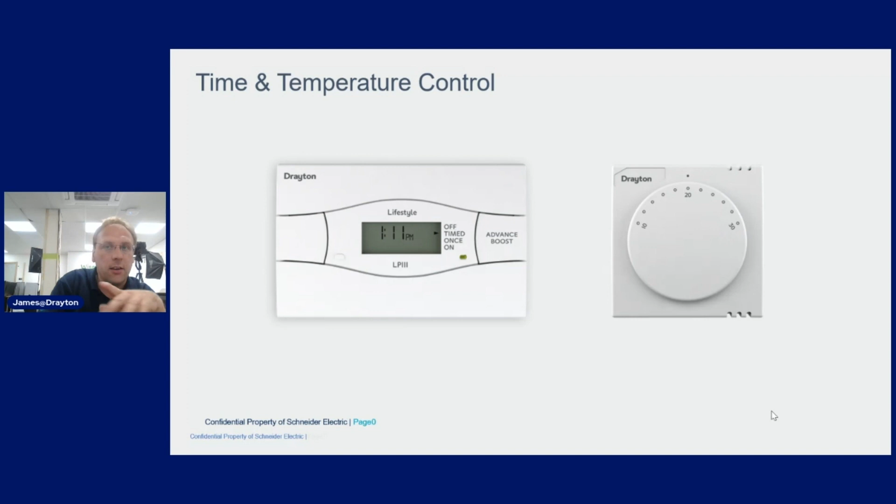So it's going to replace a time clock and a standard up and down non-programmable analog room stat. And it will also replace the Digistat Plus. So this is available as a Plus and a Plus RF. Still current at the moment, but you'll see as we get through that this new Digistat will take the place of all of that. The Digistat Plus is non-programmable, so you're obliged to have something on there doing your timings.

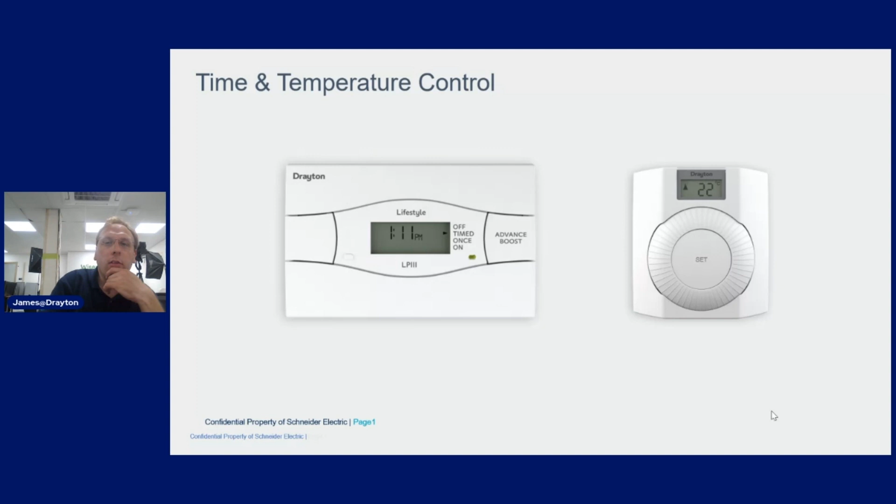Again, not terribly popular with combi boilers, but you do see a lot of these if you're doing, say, twin zone, which is your S plan, or biflow, your Y plans. A lot of people will have these as their air temperature sensing option. And this is what it's going to replace. So the familiar one with the wavy bottom.

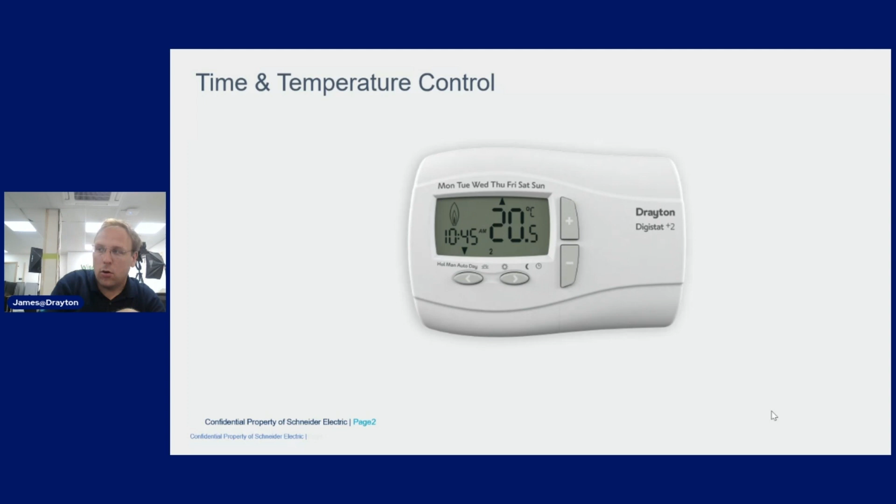Now you'll remember that there were loads of these, and you'll see on a slide that I show you in a minute, there were loads of different SKUs to this range, and one of the things we've tried to do with this new Digistat is simplify that range so that you're not having to hold massive amounts of van stock or getting really confused with part numbers depending on what model you want. So that's the sort of things that we're going to replace.

There are in fact two new RF options. There is a single channel which takes over from the RF 700, which is your Digistat Plus 2 RF, and the RF 701, the Digistat Plus 3 RF. But we now have a 2-channel version. So you've got the ability to easily upgrade your customer to an intelligent control just by swapping out the 2-channel programmer. When we look at the wiring in a minute, that will become clearer. So this is the sort of stuff that we're going to be replacing. This is what we're going to be replacing it with. So regardless of which version you have, they all look broadly like this.

And we've also now got an extra button. If you remember, if I pop back to that one, you've got your left and right hand arrow keys and your plus and minus. Now, anybody that's had to program one of these, particularly a plus 3 RF, and you want every day differently, you are hammering on that right-hand arrow key quite a lot.

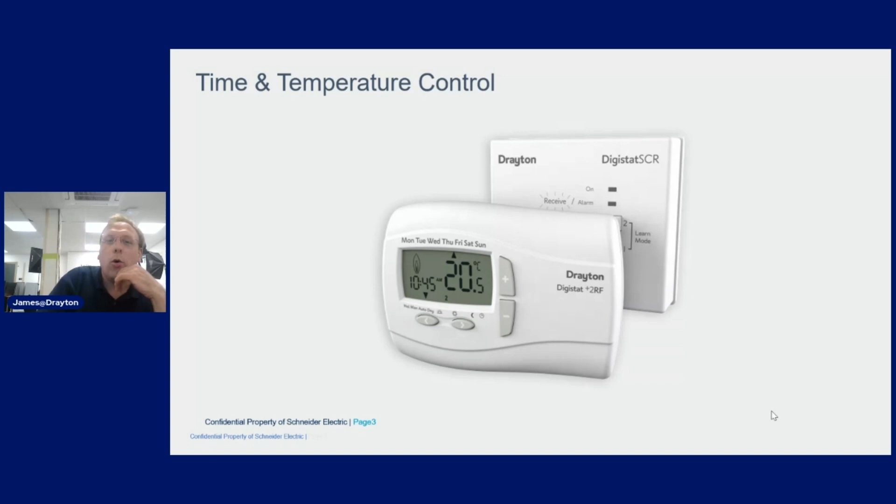So the idea is now you've got this confirm button, this extra circular button. You can view it as like a confirm button or an OK button, and that essentially allows you to take a lot of the button pressing out. You make a change, you confirm it. Much more logical and much more intuitive way of programming these.

So what's it all about and why have we done it? Well, the old one obviously has been around for quite a long time. I think it's sort of 19, 20 years that the wavy bottom version has been around, and it was time for a refresh, both in terms of features, but also in terms of the way it looks.

But one of the key features and one of the unique features to Drayton is the fact that we've got this Bluetooth app control. So this is by no means a connected product like Wiser. It's not something that you're going to connect to the internet, or use for remote control or linking to things like Alexa. This is purely local control over Bluetooth. But again, it's with this view that we want to give the customer the easiest way of controlling their device.

Now, depending on where the location of the Digistat is, it may be that it's not particularly accessible. So we've now given them access using the Wiser app. You download the Wiser Home app, the same app that you would use if you were installing Wiser, but the customer then connects via the Bluetooth journey. That means they've got control of their heating system using an app, but only whilst they're in the property. It doesn't require internet or a permanent connection to a third-party cloud service. You just connect your phone directly to it.

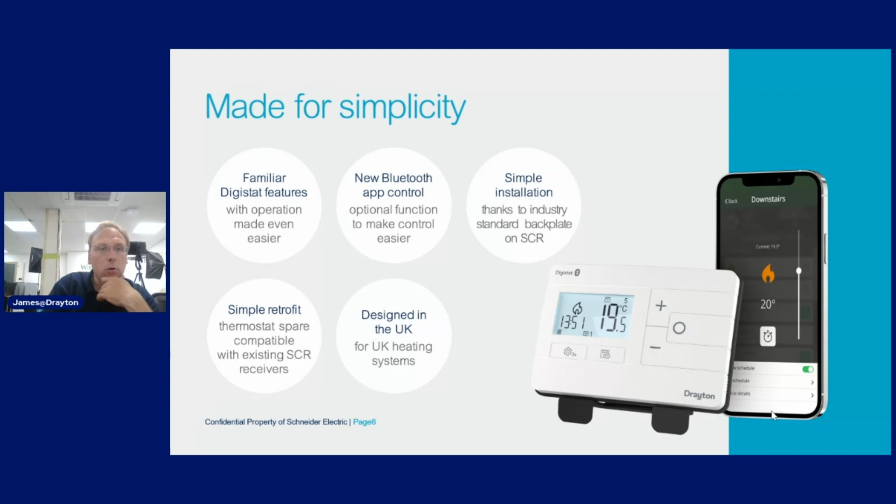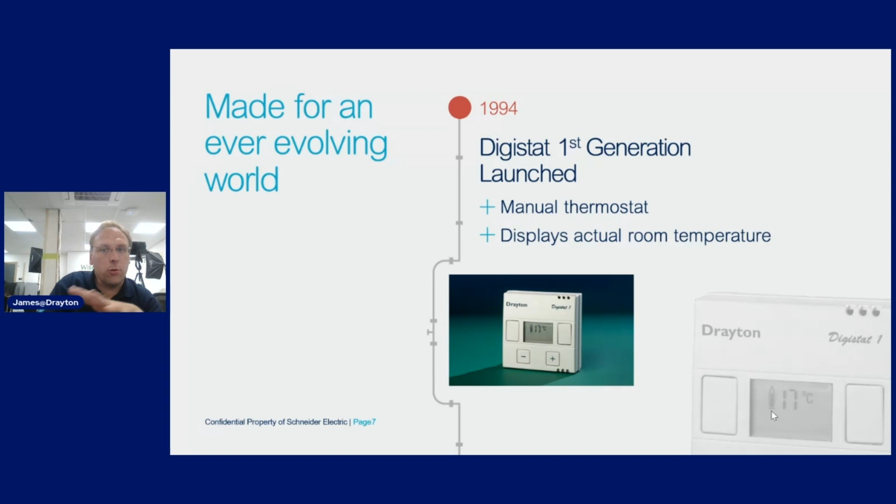And as always, with all our products, it's designed in the UK and designed for UK heating systems with UK installers in mind. So here's a little bit of a trek back in history. If you're old enough to remember the old square box Digistat, that launched in '94. I certainly wasn't doing this then. So first generation, and this was very much non-programmable. So the Digistat 1, and we also did an RF 1, which was the wireless version, just a standard up and down, plus or minus, very much like the Digistat Plus, which we've got now. But that's really where the whole Digistat journey started.

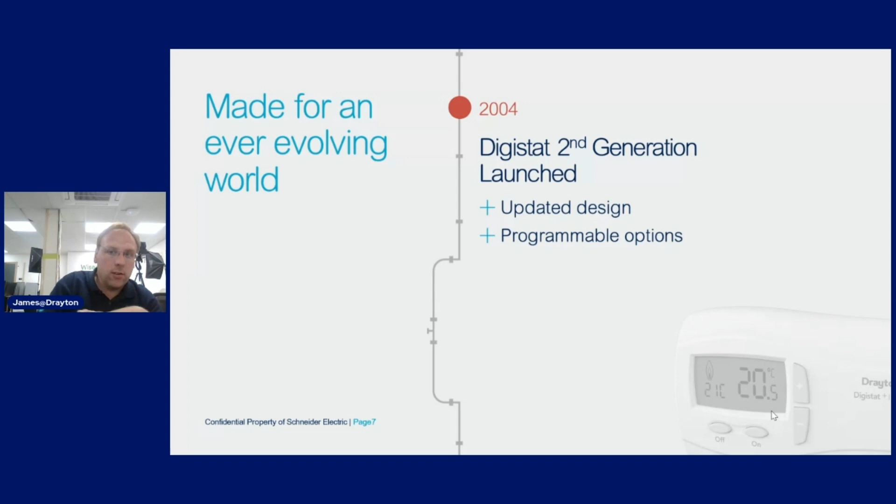And then moving on to 2004, so 10 years later is when the second gen, the one with the wavy bottom, came out. And we had then the programmable option. So this ability to be able to set different time and temperature events throughout the day, not having the need to have your time and temperature devices as separate devices, which you have to wire between. This is one wire, 5-core out of the boiler, say, into a backplate or into the actual control, and it does everything you need, both time and temperature.

Now, as it went along, we added some more options. So we quickly brought out the wireless versions. But as you see, by the end of 2004, we still had 16 variants, which, if you're trying to keep stock of this in the van, it's highly unlikely that you're going to keep one of every 16. And really, as we moved on, by 2016, we were starting to add SI versions. So you ended up with about 20 different SKUs in the range. So that's now stopped with the new Digistat, and the new Digistat renders down into 4 separate versions.

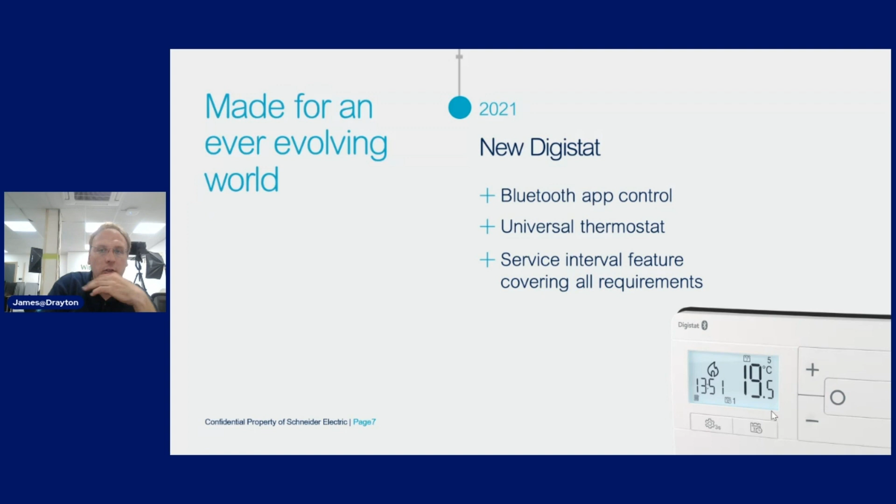So rather than purchasing the control based on programming, so if you wanted a 24-hour, you choose a +2, or a 7-day, you choose a +3, you now choose it based on the application. So what wiring is going to be there? 2-wire, 4-wire? Is it RF? Is it 2-channel? So you've now got 4 SKUs. Makes it much easier to keep enough kit on the van, so that you're not having to run to the merchants, and it just makes everything a lot simpler.

Now, this here is really talking about the whole backstory. So we know that having a smart, intelligent, programmable room stat is one of the biggest things that you can do to drive efficiency into your property, and particularly with Boiler Plus, most people are looking at controls to fulfill the requirements of Boiler Plus. So we know that the method of control is there for energy saving, but we've got this whole backstory, and this is the added value that you get, which is all of the manufacturing that's gone into it, where that's also made for net zero.

So things like no single-use plastics, making sure that any plastics we do use are recyclable, making sure nothing goes to landfill. And this is what sets us apart from the competition in a lot of cases, is that as well as producing a product which in itself can have a significantly positive effect on people's energy and climate change as a whole, we've also got this intense look at what's going on throughout the manufacturing process, and making sure that whilst we end up with a really good product at the end of it, it hasn't cost the earth to get there.

So really, that's another thing that, from the customer's point of view, it's a warm feeling to know that we have been looking after the planet and making sure we can do as much as we can through the manufacturing process, as well as the life cycle that then begins with the customer with the product.

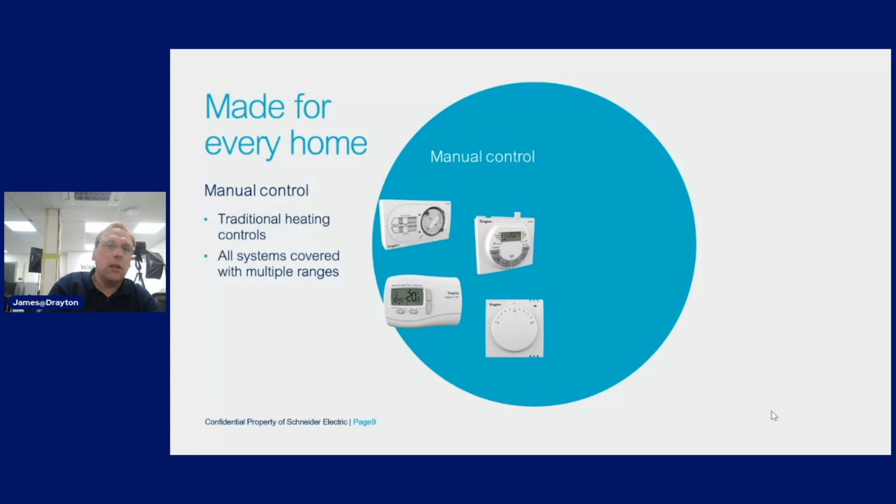So these manual controls, they tend to be our legacy products. They still do have a place in the market, but we're moving away from that in terms of the intelligent control. You've got the complete other end of the scale, which is Wiser, with the smart, that you've got individual room control, but the big thing with Wiser is the connectivity, all the cloud services, everything being collated and being able to see your energy usage.

It's certainly the way that we're moving, but it's not for everybody. If you haven't got an internet connection, or you're not interested, there's certainly generations of customers that I used to install for that you can't sell this to, because they just aren't interested, and it's not in their psyche to have a connected home, and it's causing more problems than it resolves. So certainly not for everybody, and that's really where the new Digistat sits.

It sits in the middle, and it's the bridge between the manual control, the familiar stuff that everybody's learnt to love over the period since it launched, and Wiser, which a lot of people aren't that comfortable with, having something that's constantly connected to the internet. So this is really where the new Digistat sits.

No Wi-Fi required. You do still get the app control, so you will use the Bluetooth link to the Digistat, but using the Wiser app. Now, obviously, you could say, well, to get the Wiser app, you need an internet connection, which is true. So at some point, you will need to go online and download the Wiser app. And similarly, if we need to do any firmware updates, we can do that via the cloud, bridging using your phone. So if your phone has an internet connection, when you go through and register, we can check to make improvements or feature additions that way.

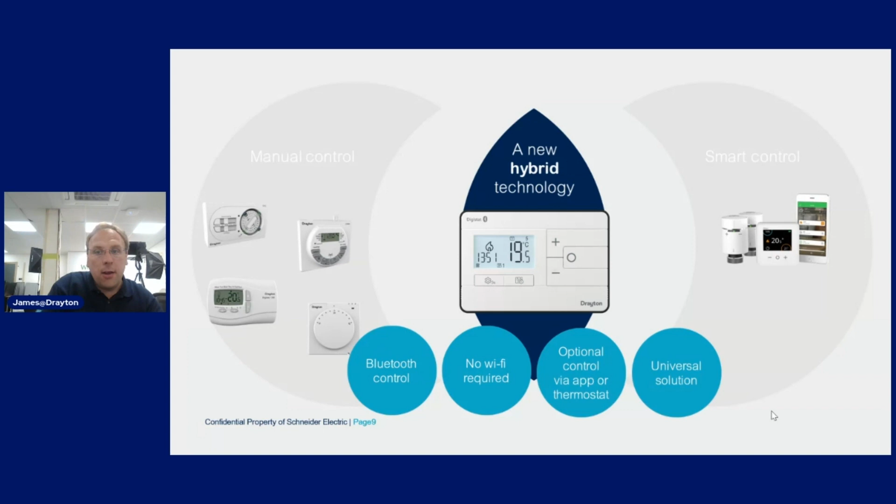So you don't need a permanent Wi-Fi connection. You might need something when you set up and first get going, but then, if you never want to connect it again, you don't have to, which is not how you would run Wiser. Wiser needs that connection, because there's so much data and so much cloud service going on. And I mentioned this universal solution. Well, that's what we're talking about, where we've now got these 4 SKUs.

So what's in it for you as the installer? Why would you be pushing this to your customer? Well, universal programming, that's the big one. So like I said, you're not buying a product for a particular way of timing it. Oh, it's +2, it's 24-hour, I needed a +3, back to the merchants. You're not doing that. It's user configurable.

So if you want every day the same, you can do that. If you want every day differently, you can do that. And if you want it on a 5-day, 2-day split, you can also do that just by changing the parameters in the back end. We have optimized it for all heat sources now. So we've always done oil, gas, and electric, but we've now got heat pumps in there.

So when you're setting the fuel type, what you're doing is setting the cycle rate. So gas, which is the default, 6 cycles per hour. So the boiler is likely to fire, assuming there's demand, once every 10 minutes, and the control will work out based on its thermal profile how long in each 10-minute block it needs to run in order to fulfill set point. Oil, 3 cycles per hour, once every 20 minutes. Electric is the fastest, 12 cycles per hour, so once every 5 minutes.

Now, for heat pump, we all know you don't want to be cycling a heat pump. So if you set it to heat pump, that takes away all the modulation. So essentially, if there's demand, the relay contact is made. As soon as you hit that demand, that's when the relay de-energizes. You're not cycling the heat pump. So we've optimized it for that.

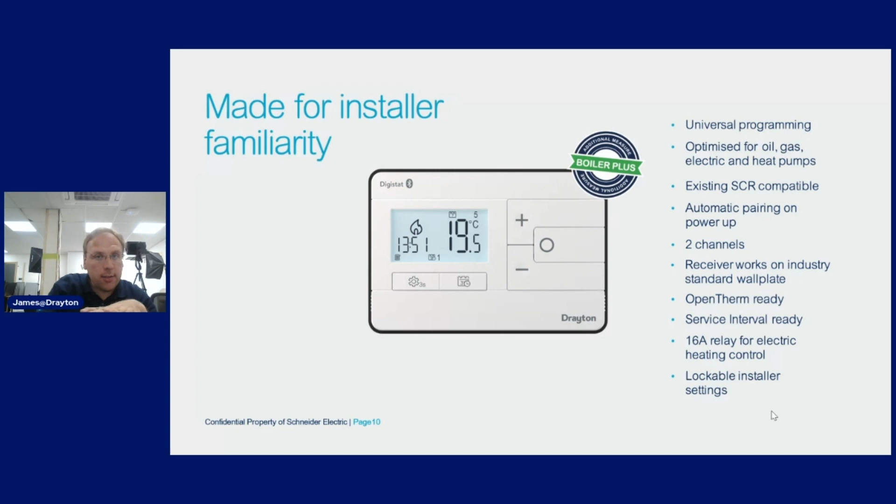Now we've got a 16 amp version. So the mains version has got a 16 amp relay in it. So you can use that if you've got any electrical heating loads that you want. And it's also lockable by the installer. So if you want to access protect this, you certainly can do.

Now, from the customer's point of view, obviously the big headline is the Bluetooth app control, but we've also made manual control much easier and much more intuitive with that fifth button. And you've now got the audible feedback. So when you're changing temperature, the buttons will beep at you. And when your set point traverses where the ambient temperature is, you get a different tone of beep.

So what that basically means, for anybody that can't quite make out the digits on the screen, anybody that's partially sighted, all they've got to do is start pressing either the plus or minus button in any particular direction. And they know that when the beep changes, the set point and the ambient temperature match. And then, depending on which way they want to go, they can count the clicks, each click a half degree increment. So if it's 20 degrees, they know 4 clicks on the minus, I've just set it to 18, or 4 clicks on the plus, I've just set it to 22.

So a really nice way, if you've got somebody that isn't able to see, or maybe even if the Digistat's not in the most accessible place, you're able to make your temperature changes just by listening to the beep that it gives you.

Now that fifth button that works as like a confirm button also gives you a boost feature. So if you've got a schedule set up, but for some reason you need heat outside of that, you don't need to advance. You don't need to manually put the heating on and then forget to turn it off, and it's on all night. You can just use that center button, that circular button, and you get anything up to 1, 2, or 3 hour boost at whatever temperature you want.

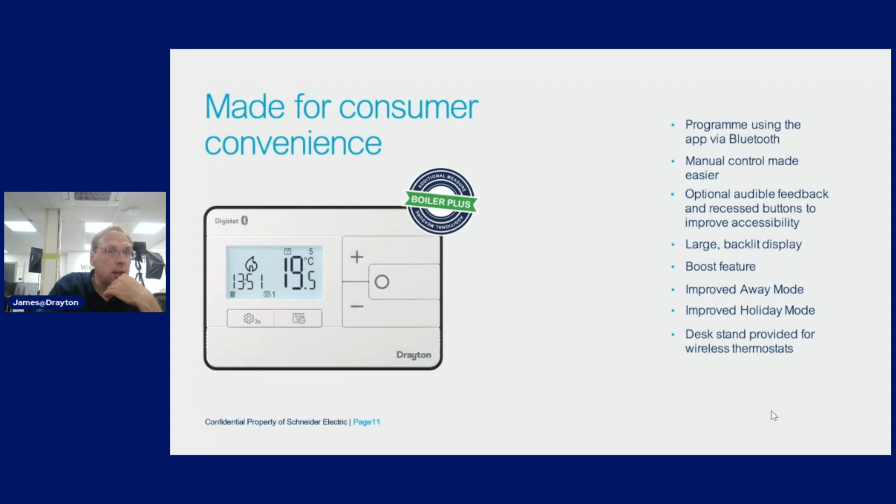So as I said, it boils down to 4 separate SKUs. So the 2290B is a battery version. That's a 2-wire thermostat, particularly useful to keep as van stock, because regardless of whatever thermostat you come up against in the field, there's always going to be a live in and there's always going to be a live out. So 2290B, really good. I used to keep loads of those, or certainly the battery version of its predecessor on the van, because I knew that whatever I had there's going to be those 2 wires. So the 2290B is always going to be a suitable replacement.

2290M is exactly the same thing, except it doesn't have batteries. It's got a mains connection, so you've got 2 extra terminals in there. You're going to be fitting this probably more if it's a new installation where you're running cables to it, because batteries are going to need to be changed every 18 months to 2 years. The mains one will be there as long as you've got power going to it. So 2290M is aimed more at if you're going in, or if you know what's there already.

If you've got a 4-wire thermostat, you sort of need to have taken the old one off the wall first and looked at your wiring before you buy the 2290M. Whereas 2290B, regardless of what's there, if you've got 4 wires, you just don't use the 2, the live and the neutral. And if you've only got 2 wires, those are the ones that you're going to use. So those are the wired versions.

Then we've got the RF version. RF901 is your single channel wireless, so it replaces the RF700, which is the Digistat Plus 2 RF, and the RF701, and indeed the RF710, which is the Digistat Plus 1 RF, because you can use these in manual mode, and then they're not a programmable thermostat. So that really replaces all of the current estate of single channel wireless.

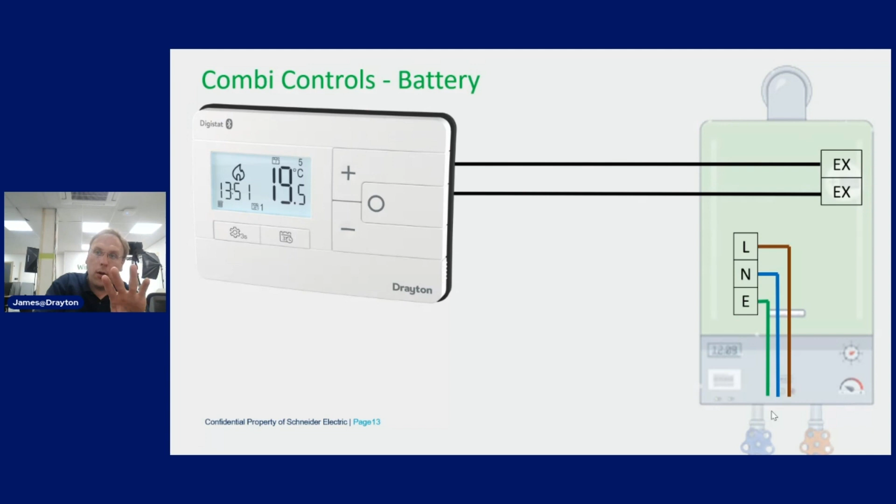If you've got the 2-wire, the battery version, you're just connecting to what would be LS and LR if it's a Worcester boiler, or the RT terminals in your boiler. This is volt free as well, so there's no need for you to worry about what voltage your boiler is. You can go to either the mains bus, or you can go to the 24-volt side, because the switch in there is volt free. Mains version, exactly the same deal.

So you're going to be wiring directly to the external controls connection on your combi boiler. The only difference here is you are going to also be taking a live and neutral out to the Digistat to power it. You don't need to take an earth. It is a class 2 product. But again, because you're running it on mains, you don't need to. There's no influence on the mains with the switching contacts. So the fact that you've got a live going out there, the switching contacts are still volt free.

We've also got OpenTherm on the mains version. So you've actually got an extra terminal rail, 2 terminals together on the mains version, if you want to run it via OpenTherm, and this will then auto detect. So you see there you've got a flame symbol on the Digistat. That flame symbol is what shows when there is demand when you're using relay control.

So the general rule is, if you see a flame there, you can pretty much say that the relay inside has fired. If you're using this on OpenTherm, you don't get that, because you're essentially firing all the time, because you're just demanding different flow temperatures. So instead of that, you just get an OT symbol in the middle of the screen. As long as you've got that, it's detected and it's controlling via OpenTherm. So a really nice feature, but only on the mains version. So on the 2290M you've got OpenTherm, not on the 2290B.

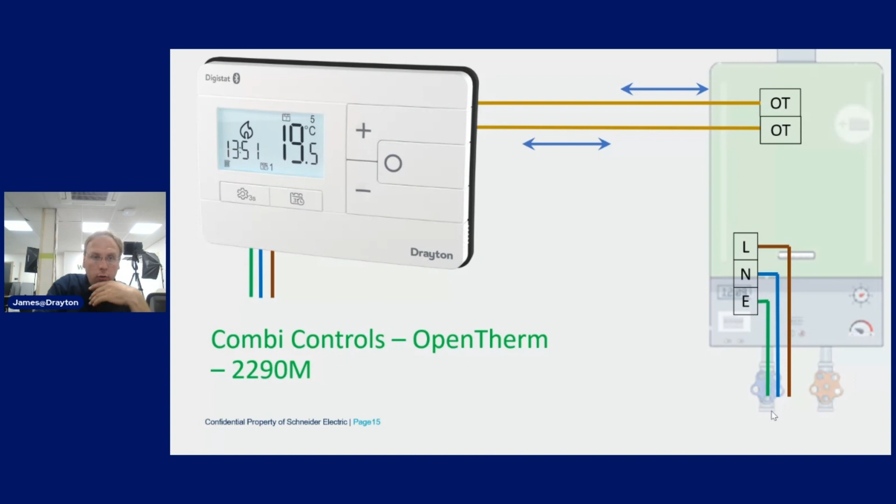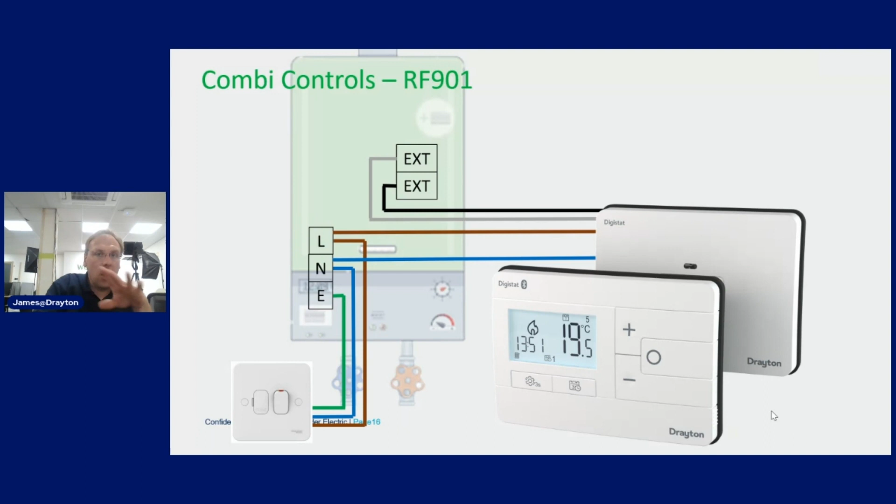So then we come on to the wireless ones, and again, same principle for a combi. External connections onto terminals 1 and 3 on the backplate, and it's our standard backplate. And again, you've got your neutral and earth and live to actually run the receiver, but no influence on the switching contacts. The RF901, so the single channel receiver, also has OpenTherm. So OpenTherm is available on the mains wired version, the 4-wire thermostat, and the RF901 has got the OpenTherm connections.

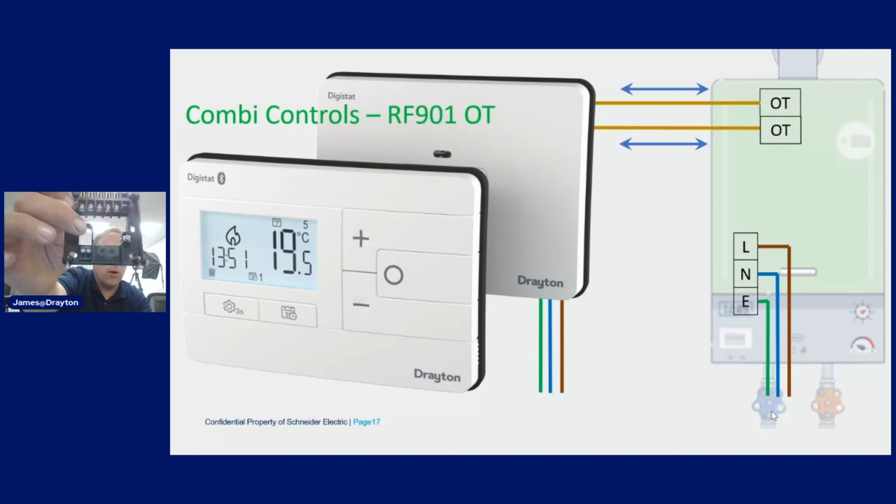And what that actually looks like, if I show you the backplate, you've actually got this extra terminal rail just at the bottom there that you don't get. So if you're using OpenTherm, then you will need to swap out your backplate, because you won't have those terminals on your existing one, because that is new for this product.

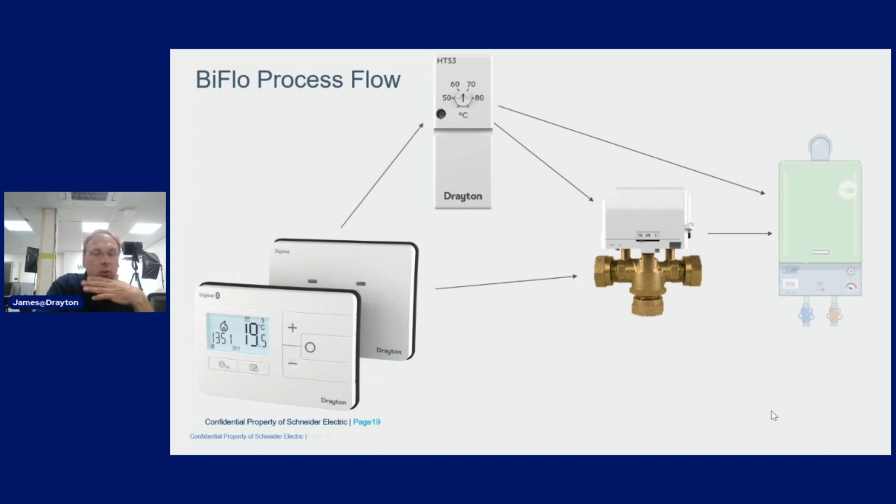And then in terms of your process flow, what you're going to be removing, you're going to lose the LP and the room stat. You're going to keep your cylinder stat, because again, we don't know if it's vented or unvented, so you use that. And when we say you lose the room stat, that's essentially linking it out in the wiring center. Exactly the same process for your twin zone.

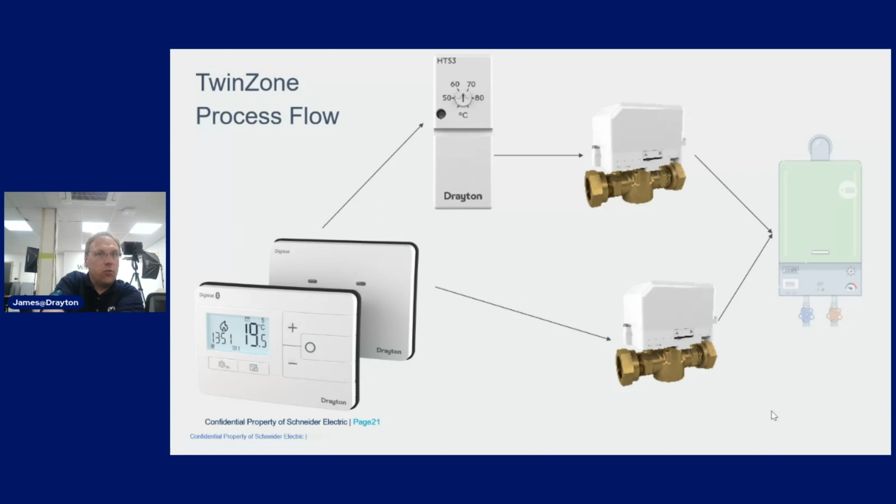Now, obviously, this is a process flow rather than a wiring diagram. The reality is all of these things wire back to a wiring center, but just in terms of time, temperature, valves, and boiler, this just shows you where it's going. So you're losing your room stat, you're losing your timer, you're linking out your room stat, but you've still got your temperature sensing for your hot water controls.

And like I said, you can also do this 2 thermostat process flow. So 2 thermostats out to their respective zone valves and then off to the boiler. That's if you want to do an easy way of zoning a combi boiler.

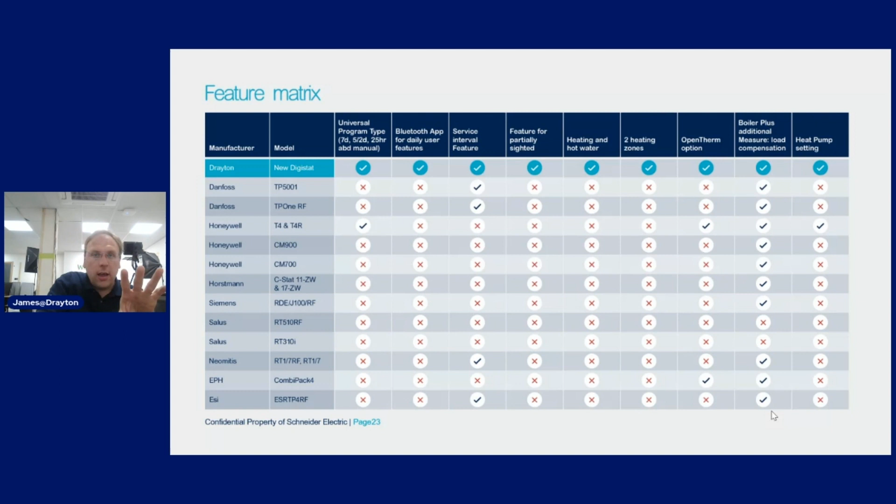And last slide, before I get onto something a bit more interesting than a slide deck, this is really just the comparisons compared to our competitors. It's just a bit of benchmarking. So if you're interested in that, when the recording goes up, you'll be able to pause that and see exactly what you're getting with the new Digistat.

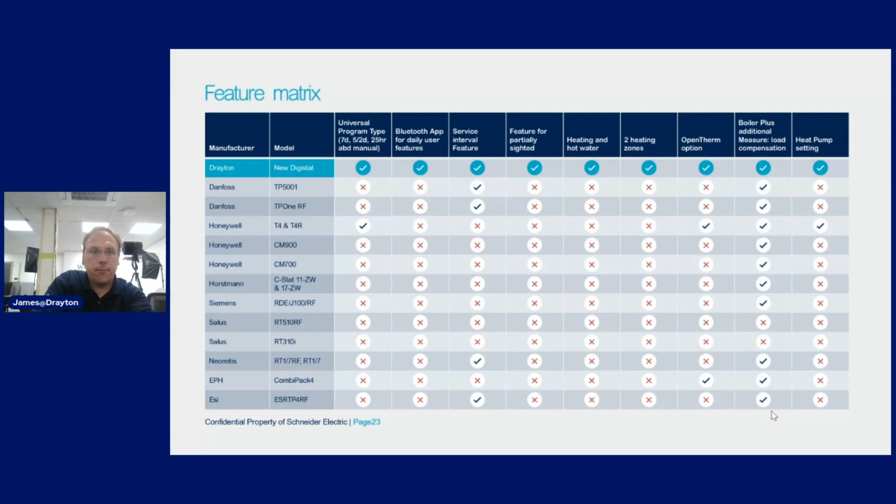Right, I'm going to come back into the room, and what I want to do now is take you through some of the commissioning side of it.

So if we have a look at the RF901, so this is the wireless version, the single channel wireless. Now, the mistake that everybody makes is they get the room stat out of the box, and the first thing they do is they put the batteries in. Now, when you do that, the room stat is hunting to see where the receiver is, and it's not going to find it, so it will time out.

And then when it's timed out, you then have to go in and initiate the pairing again in order for it to connect. So the single biggest rule with these is don't take your room stat straight out of the box and pop your batteries in. Do your receiver bit first. So if we power up a receiver, this is what you should see.

So when you power up the receiver, you get the red light, and then you're in join mode. So it's flashing between red and green. Now, when it's doing this, you don't want to go off and make a cup of tea or nip out to the van. You want to make sure that when you've just powered it up like that and it's in join mode, that's the time to pop the batteries into the room stat. Pop them in like that.

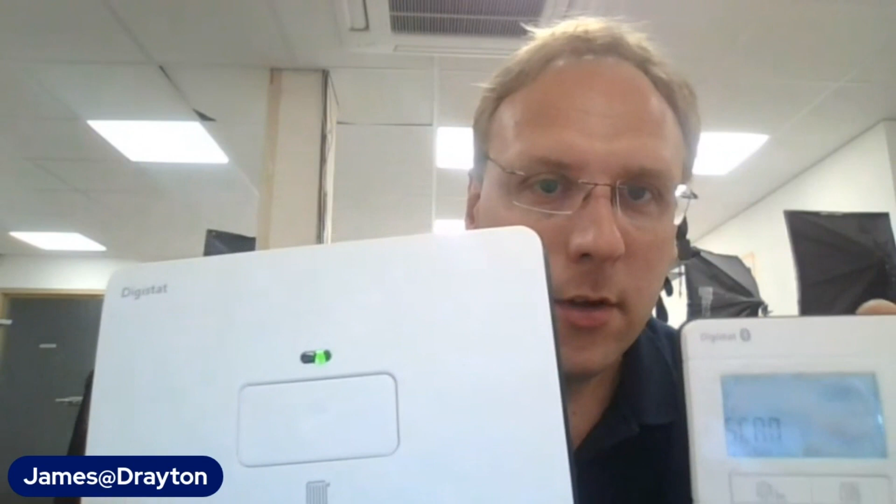And then as soon as it powers up, you'll see that it will join. So the Digistat is scanning. Tells you that it's received it, and you hear the click. And there you can see now the receiver is no longer in join mode. There's a call for heat, and you can see that by the flame symbol. So you get the green light.

If I drop the temperature down on the Digistat, and there you can hear those beeps. Drop the temperature down. Let it register, and then you'll see that the green light has gone out. So the normal condition for the receiver is either no light at all, which means there's no call for heat, or a green light, meaning that there is a call for heat.

But like I say, the important thing is once you've powered this up, immediately put your batteries into your room stat. Don't go off and do a load of other stuff, because again, this will be searching, and if it doesn't see it, it will time out.

So next one I'm going to show you is the process for the 2-channel. So this is your 2-channel receiver, and as you would expect, 2 buttons on the front. Now, one of the interesting things with this is that the buttons on the front don't actually do anything on a working system. So if we take this system here that I've just showed you, this is just paired up. It doesn't matter how much you press the button on here, you can't override a working system.

So this button will only influence your heating system if it detects a fault. So if it's lost the link with the room stat, or if there's something else going on. So you can't override a working system. Exactly the same principle for the 2-channel. Let me just whip the back plate off of that one.

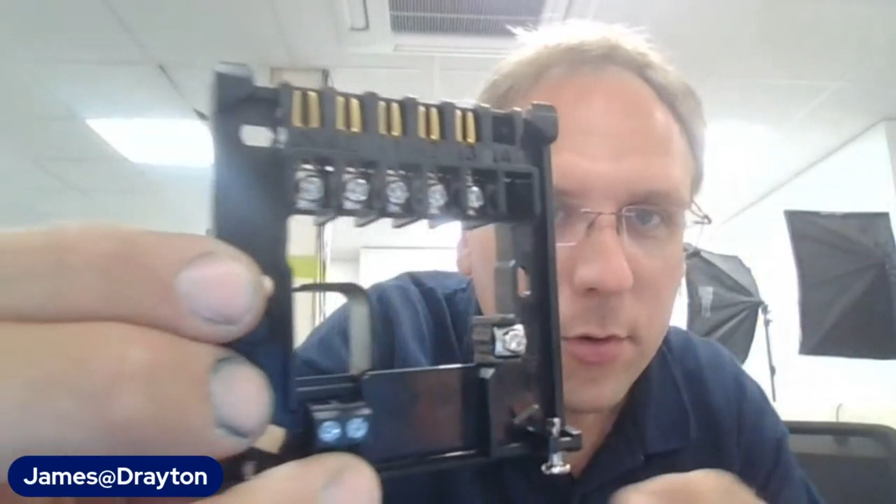And while I'm doing that, I'll just give you another close-up of the back plate for the RF901. You can see those there are your 2 terminals. These ones here are your 2 terminals for the OpenTherm. So if you're not using OpenTherm, don't worry about it. You can use your standard back plate. But if you are, then you'll need to swap it out for that.

Right, let me pop the 2-channel onto the back plate. So exactly the same arrangement. You'll get your flashing green and red. That means it's in join mode. So we then pop the batteries into the room stat that's come with the control, because you'll always get one in the box, and the one that comes in the box will be paired to the receiver. So just put the batteries in that.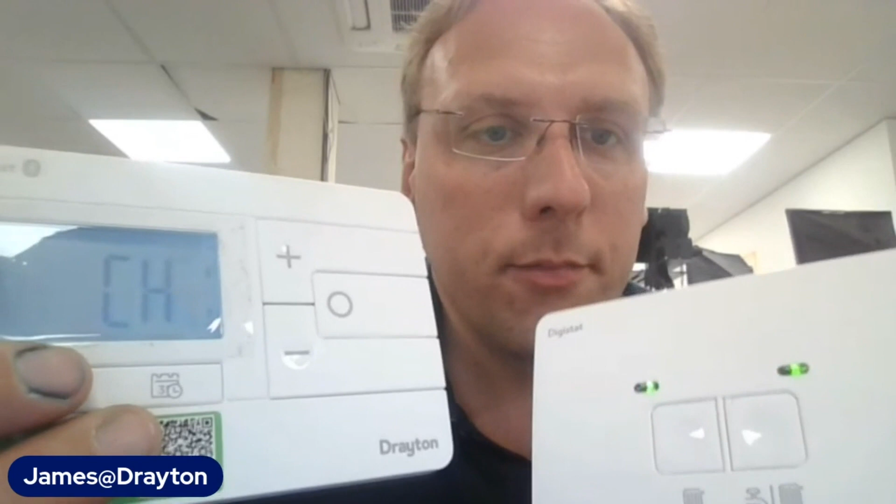Exactly the same thing. You've got the scan. It will then tell you that it sees it, and it will assign it to the heating channel. Now, what you've got here, because this is the 2-channel, you've now got some options. So whereas before it just saw it and then assigned it, you can now choose whether you want to control just central heating, or whether you want to control central heating and domestic hot water.

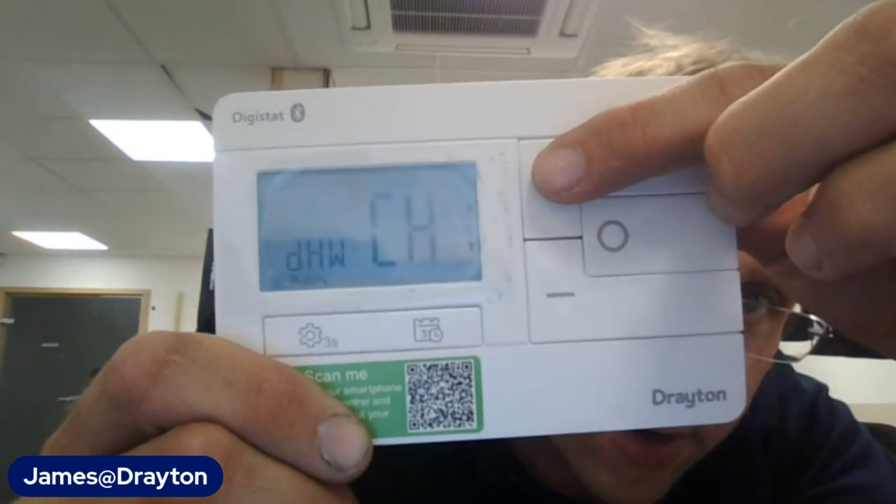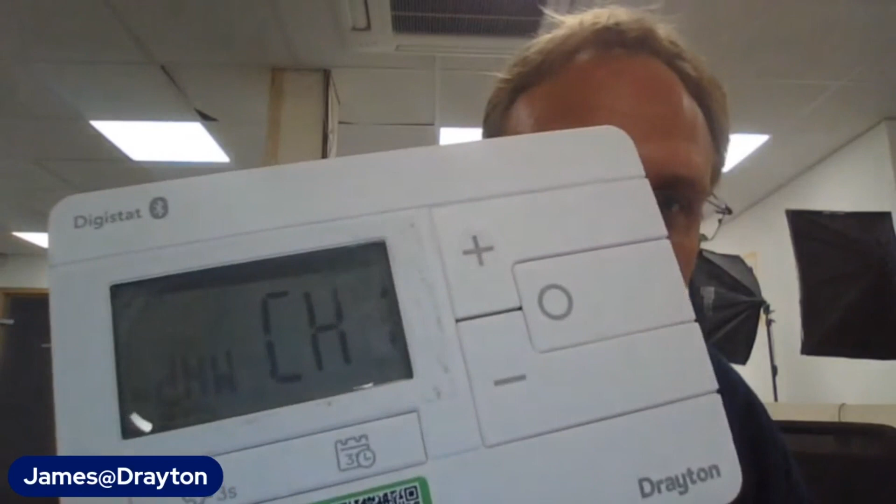So if you're replacing a 2-channel programmer, you're going to choose this, and that means that when you confirm it, your hot water button on there, your hot water channel, will go out and connect to your cylinder stat, and you'll be able to schedule that accordingly using this device. But if you just select the CH and confirm it, that's then assigned it to just the 1 channel.

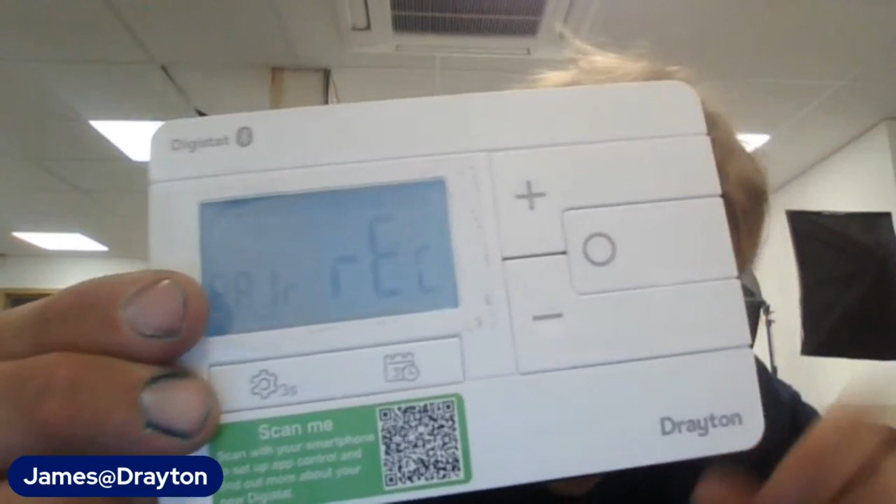So you can see here now it's no longer in join mode, because this channel here has got the Digistat assigned to it. But the other channel, you can see the button's actually still working on it. And the reason it's doing that is because there is nothing assigned to it. There is no stat, and we've not told it that it's hot water.

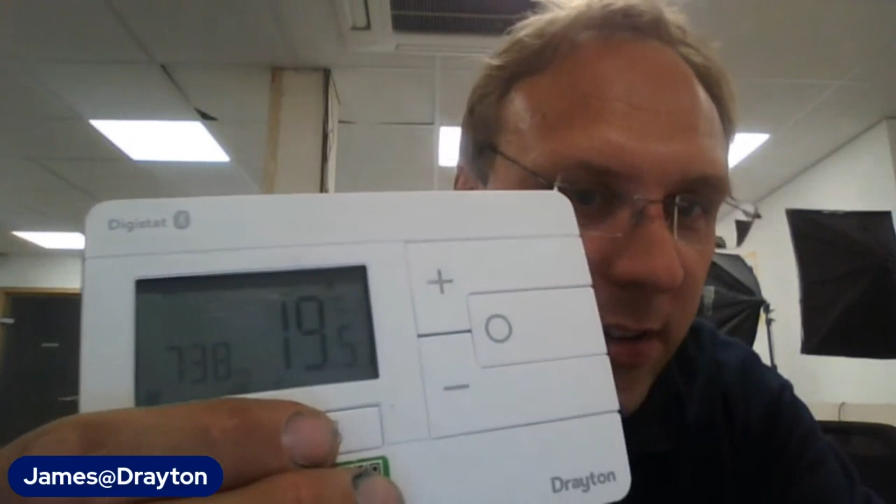So if we want to zone the combi, if we want to have 2 thermostats on one, what we do is we press and hold in the heating button, and we keep it held in. And you can see that puts us now back into join mode. You'll then get from your merchants another room thermostat, which will be a spare. Now, because it's a spare, it's not paired to anything. So we now need to force that into pairing mode. And we do that by pressing and holding the calendar button.

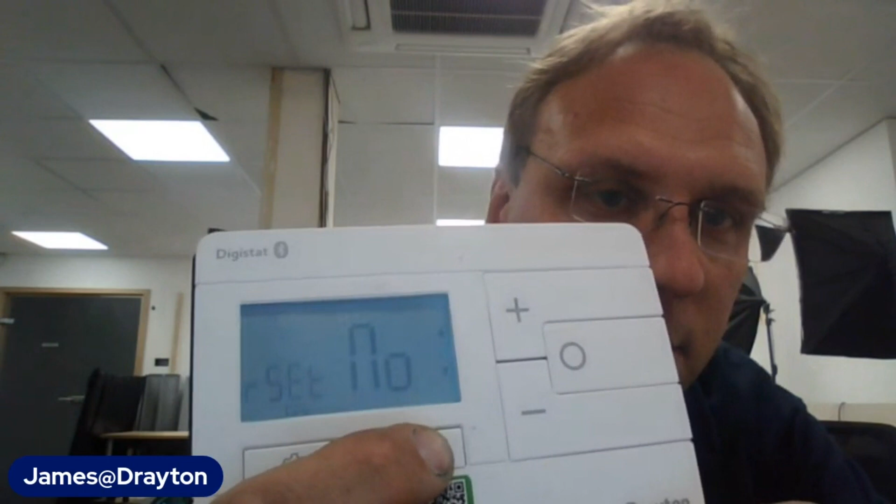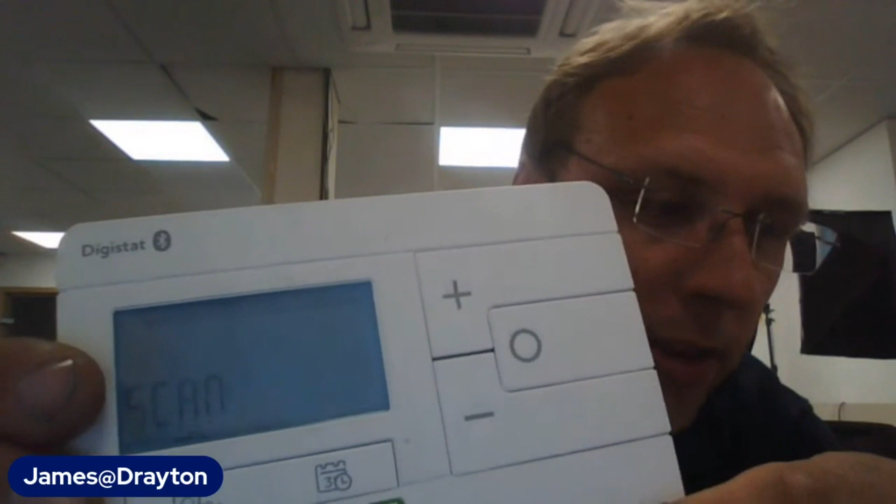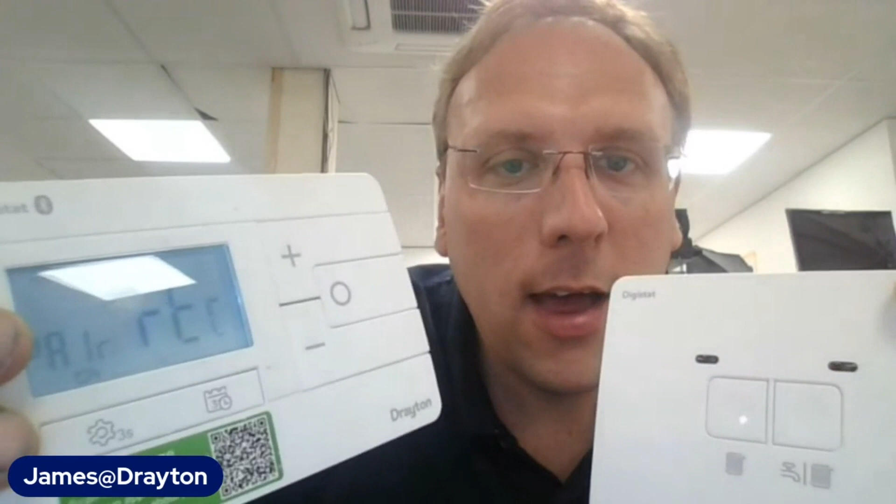Now, it will ask us, do we want to reset? Well, we do. So we press the plus button or the minus to toggle the no to yes, confirm it, and then it's in scan mode. So that's scanning. This is scanning. Give it a couple of seconds. It will tell you that the pair has been received, which is that. And you can now see that on our receiver, we've got no lights at all. Neither of the override buttons are working.

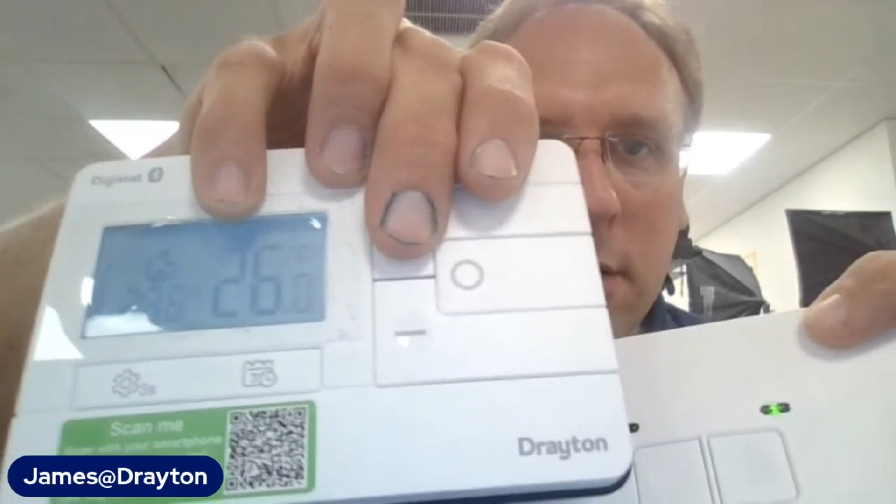If I raise the temperature up on this one here and confirm it, we will get an output on that channel. And if I raise the temperature up on the original, and confirm it, that will then fire the original channel. So there we go. So now this Digistat receiver has now got that thermostat and that thermostat assigned to it. Right, that's really covered all that I need to.

Just have a look and see if there are any questions coming in. I don't see anything here. So last 30 seconds of me going on. If you've got any questions, get them in now.